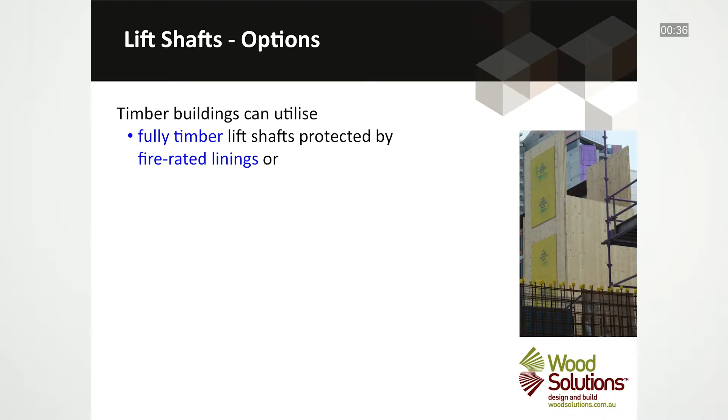Timber buildings can utilise full timber lift shafts protected by fire-rated linings, or a hybrid approach, and incorporate concrete or masonry shafts. If a hybrid approach is adopted, it is important that the potential for differential movement between the timber structure and the non-timber shaft is taken into account when detailing connections and interfaces.

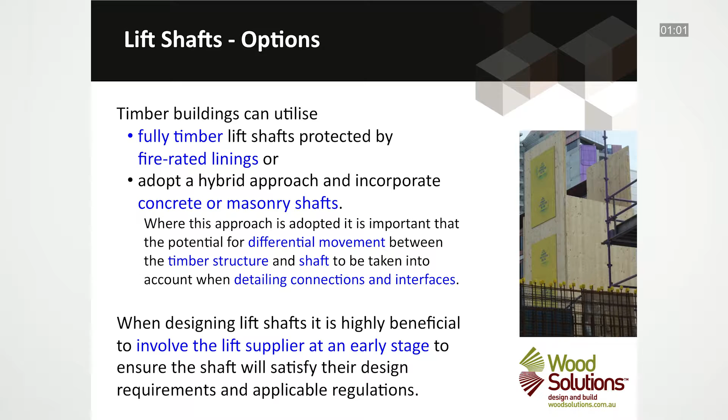When designing lift shafts, it is also highly beneficial to involve the lift supplier at an early stage to ensure the shaft will satisfy their design requirements and applicable regulations. In terms of the acoustic requirements for timber lift shafts, the NCC airborne sound requirement for walls is an Rw greater than or equal to 50.

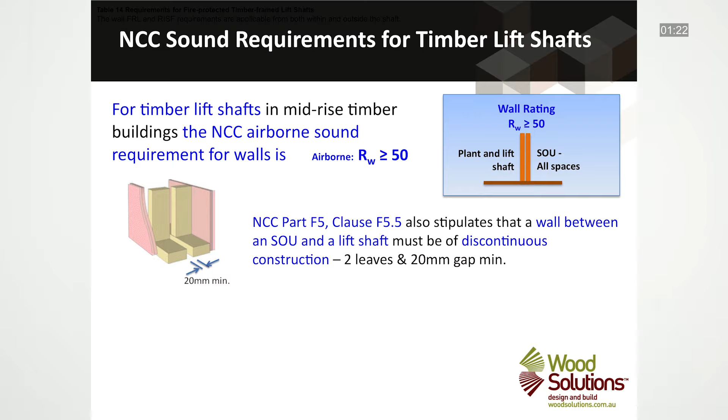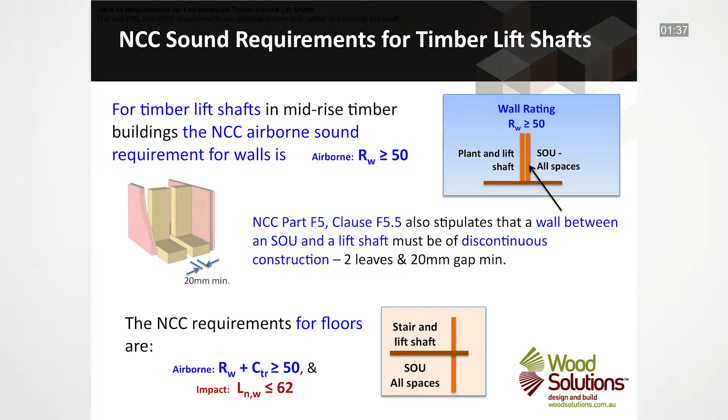The NCC Part F5, Clause F5.5 also stipulates that a wall between a sole occupancy unit and a lift shaft must be of discontinuous construction. This means two separate leaves with a minimum 20mm gap, as shown here. The NCC requirements for floors are, for airborne sound, an Rw plus Ctr greater than or equal to 50, and for impact sound, an Ln,w less than or equal to 62.

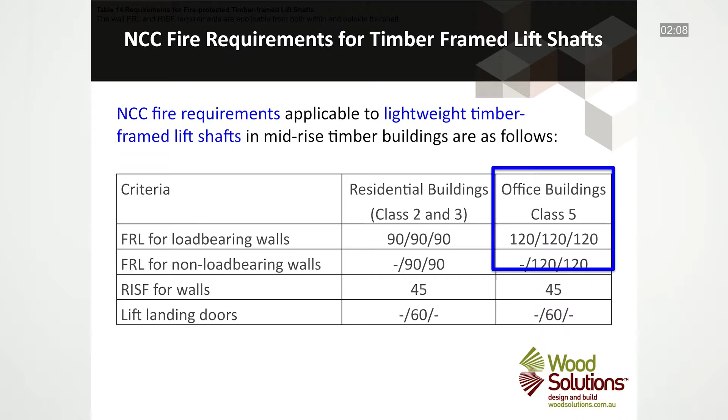The NCC fire requirements applicable to general lightweight timber framed lift shafts in mid-rise timber buildings are as follows. For Class 2 and 3 residential buildings, for load-bearing walls, an FRL of 90/90/90, and for non-load-bearing walls, -/90/90. For mid-rise office buildings of 4 storeys and above, the FRL required is 120/120/120 for load-bearing walls, and -/120/120 for non-load-bearing walls.

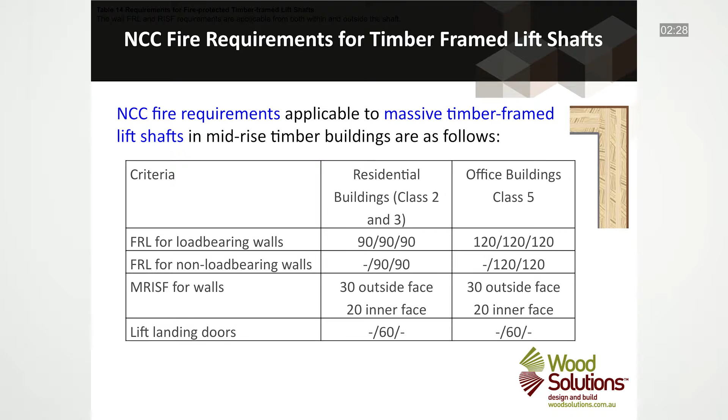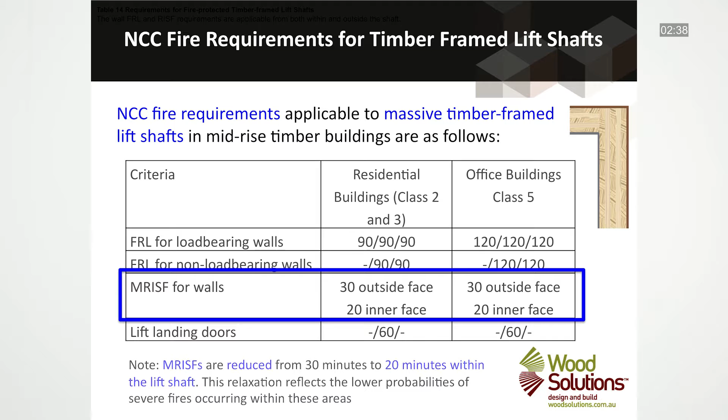For all these 3 classes, an RISF value is also required of 45 minutes, and for the lift landing doors, an FRL is required of -/60/-. For massive timber-framed lift shafts, the NCC fire requirements are similar to the general requirements for lightweight construction. However, the MRISF values are different, with a 30-minute requirement on the outside face of the shaft and a 20-minute requirement on the inside face, which reflects the lower probabilities of severe fires occurring in these areas.

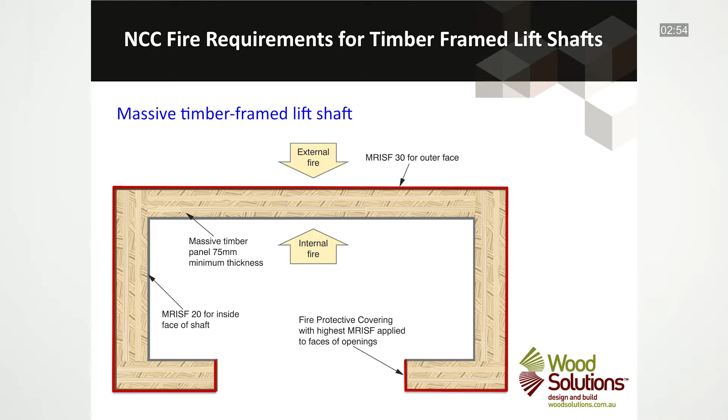This slide illustrates the requirements for a massive timber-framed lift shaft. You can see the MRISF requirement of 30 on the outer face, shown in red for an external fire, and 20 minutes on the inside face of the shaft, shown in grey for an internal fire.

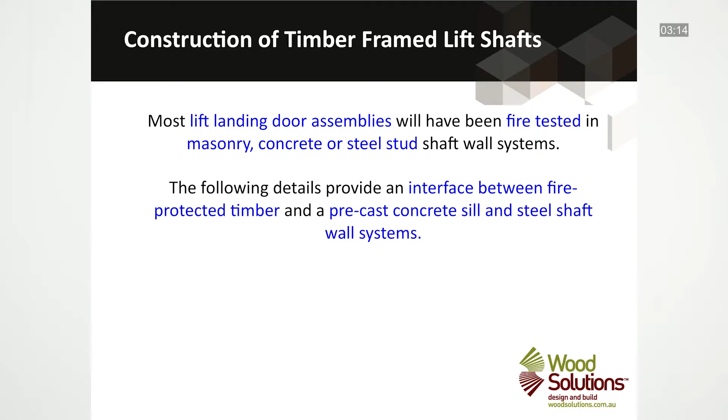Most lift landing door assemblies available in the short term will have been fire tested in masonry, concrete, or steel stud shaft wall systems. Accordingly, until further fire testing is undertaken with fire-protected timber systems, the following transition details provide an accepted interface between fire-protected timber and a precast concrete sill and steel shaft wall systems. In the longer term, it is expected that a larger range of lift landing doors will be fire tested in fire-protected timber construction, providing simpler installation details.

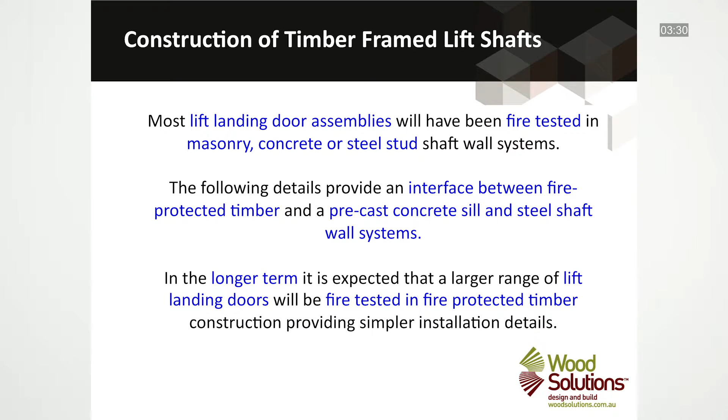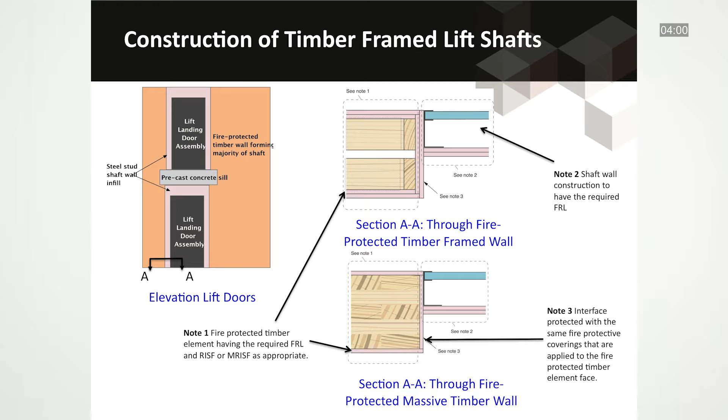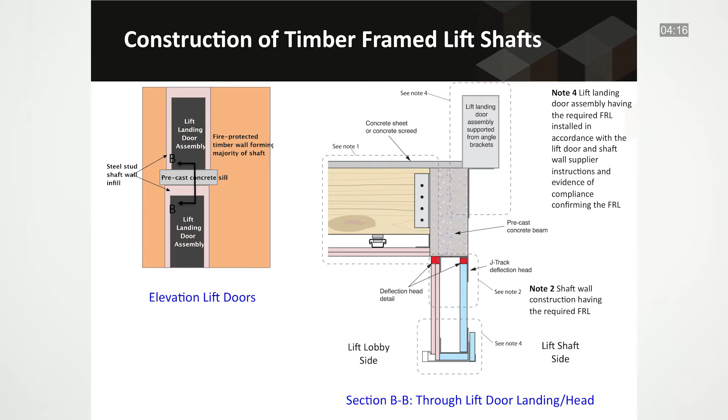In this slide, section BB illustrates the requirement for utilising a precast concrete sill. It can be seen that the floor-ceiling system is protected by the fire-rated plasterboard horizontally, but that the precast concrete sill has been used to close off the cavity vertically.

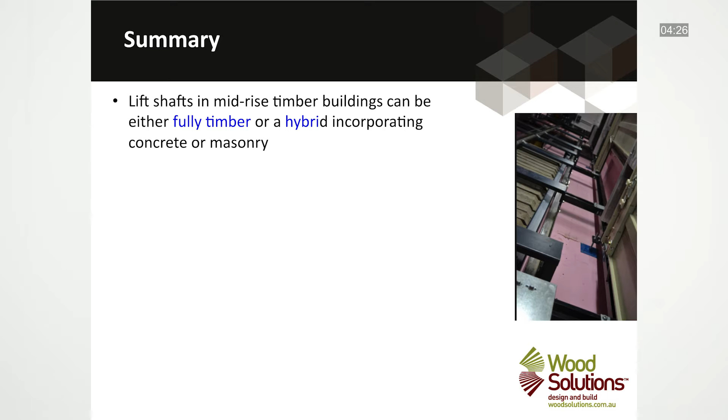So in summary, lift shafts in mid-rise timber buildings can be either fully timber, protected by fire-rated linings, or a hybrid, incorporating concrete or masonry. NCC sound requirements for timber lift shaft walls is an airborne requirement Rw greater than or equal to 50. And for floors, an airborne requirement Rw plus Ctr greater than or equal to 50, and an impact requirement Ln,w less than or equal to 62.

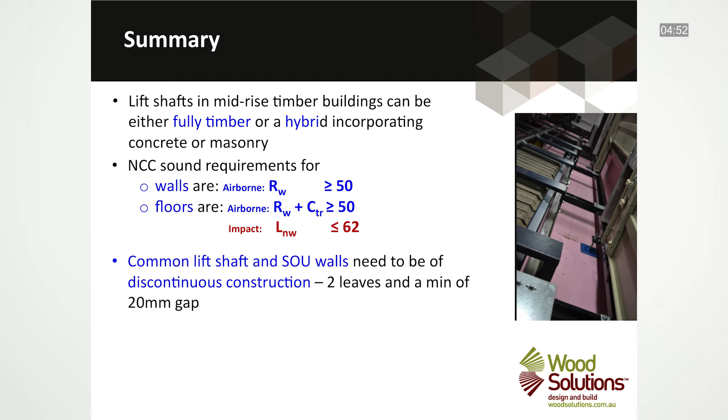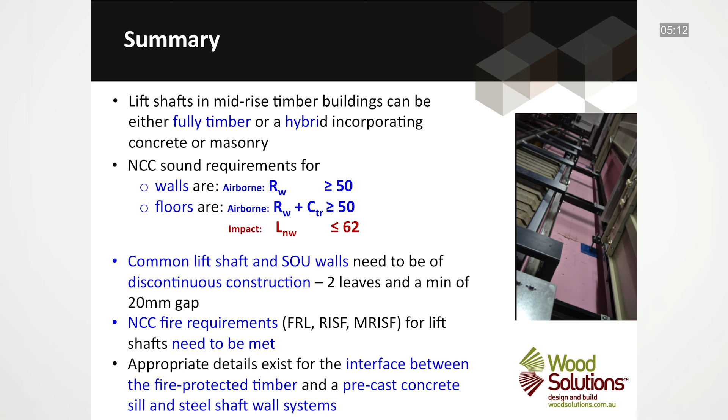Common walls between lift shafts and SOUs need to be of discontinuous construction, using 2 leaves and a minimum of 20mm gap. NCC fire requirements for FRL, RISF, MRISF for lift shafts are specified and need to be met. And finally, appropriate details for the interface between the fire-protected timber and a precast concrete sill and steel shaft wall systems are available in the interim until more specific testing is done in the future.